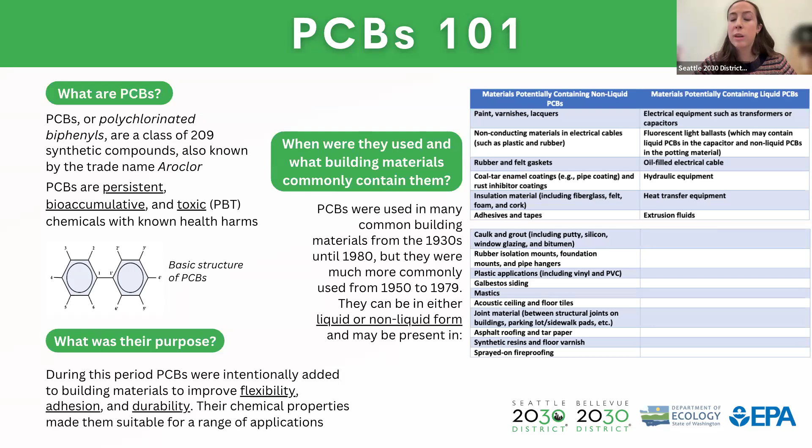Now let's explore a little bit about where PCBs are often detected and why this is important. They can be detected on the exteriors of buildings, specifically in materials like paint and window caulking, as I already mentioned, and they can get into the environment through a variety of different ways. For example, when these sources are weathered, either by human or non-human sources, so think of rain versus pressure washing, they can wash into our stormwater systems and eventually flow into our waterways. And this process shows how legacy materials are still impacting our environment long after their manufacture was banned. And we'll get into this dynamic a little bit more later.

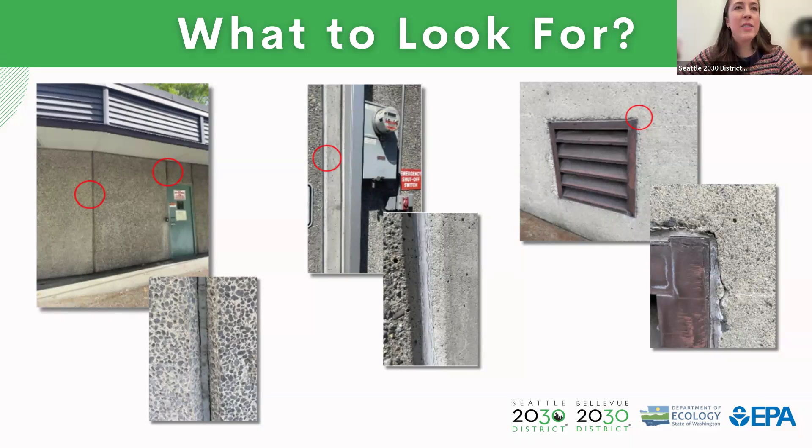Like we were saying, and as you probably just saw in that diagram, there's such a wide variety of materials that contain PCBs, so it's hard to know for sure when you're going to find them, but I wanted to include some examples here. It's just developing an eye for it, developing a familiarity with what to look for and where to look for it. Here's some more examples of exterior building materials that were suspected of containing PCBs.

So Julianne can walk him around the perimeter of a building, and he can be a good indication of where and when testing might be required. So he's a great resource.

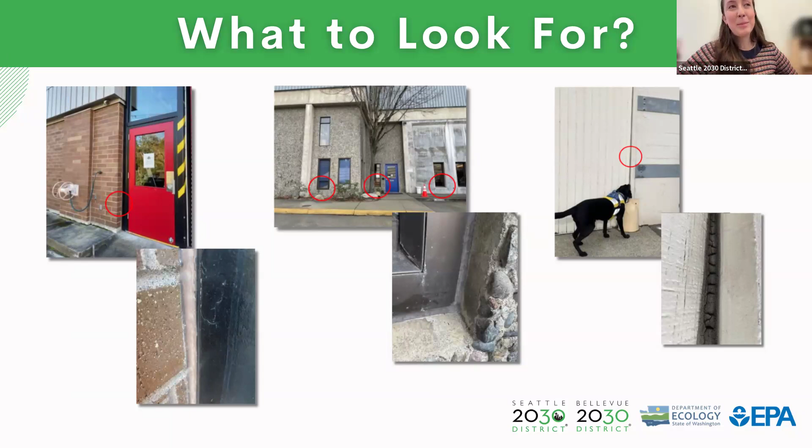But I always want to include Jasper's work because I think not only is he an incredible tool, but also a great entry point into this topic. And if I had learned about Jasper earlier, I think I would have maybe wanted to learn more about PCBs earlier too. So I love to include him. And then here are just a few more examples.

And though it's not really pictured here, I have been told by a few remediation professionals that a hallmark of spotting PCB-containing materials is if it's still shiny looking, sticky, gooey looking, even decades after it was applied. So recall that PCBs were designed to resist heat, they were designed to be a strong, resilient adhesive. And in some scenarios, it means that these materials can still look really fresh and new, even though they're very, very old.

So, this individual was talking about a PCB-containing material that was above an exit sign, and he was saying it looked fresh. It looked like it had just been laid down yesterday. So that's a thing that might raise some flags.

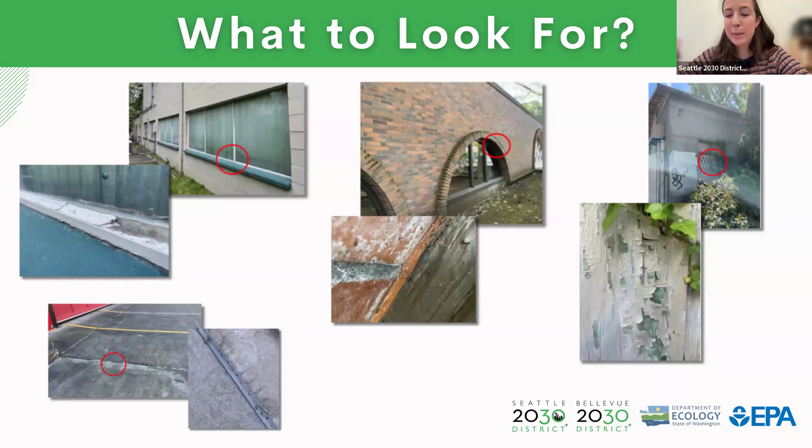I also wanted to put PCBs within the context of some other hazards that you're probably all quite familiar with. So, like lead and asbestos, PCBs are regulated by different federal and state laws. They're also classified as hazardous materials that pose risks to human health, and they're all found in these older buildings constructed between 1950 and 1980. However, there are some qualities that set PCBs apart from lead and asbestos.

So, one difference is that PCBs are synthetic, while lead and asbestos actually occur naturally in the environment, which honestly was kind of news to me. I did not know that asbestos was just naturally occurring in the environment. But in comparison, PCBs are also more expensive to remediate and they can be in a solid or a liquid form, while lead and asbestos are only found in solid forms.

And this is all to say that even if you're hearing about PCBs for the first time today, you're likely already familiar with some of their defining characteristics, and you might already kind of know how to deal with them because you've handled other hazards in a similar way.

So even though I might be introducing them to you as if they were new, they've actually been around since the 50s. They were born out of the chemical inventions that followed World War Two, just like many other chemicals we're grappling with today. So I want you all to feel not that this is something new and scary, but it's actually been around for a while, and you might know more about it than you think.

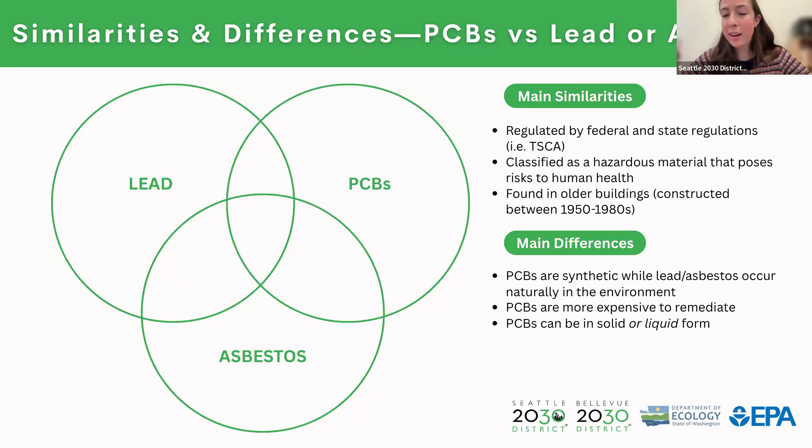Now that we have all that background covered, we can dive a bit deeper and discuss PCBs' negative effects on human and environmental health. So, in order to fully understand and appreciate some of the regulations and recommendations pertaining to them, it's really valuable, I think, to understand the negative consequences of PCB contamination. So, PCB-containing building materials can pose health risks and they contaminate stormwater, soils, sediment, and indoor air. They are persistent, bioaccumulative, and toxic chemicals with known health harms.

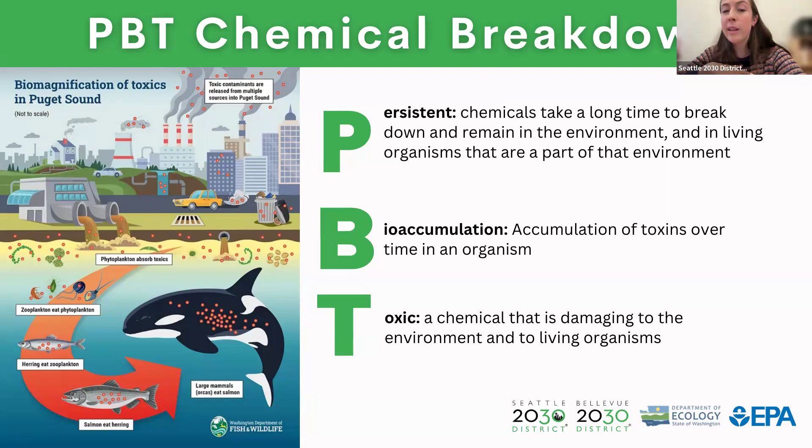And unlike other toxins that might degrade over time or be broken down after being exposed to sunlight or other things, PCBs were chemically designed to be really resilient and stubborn. So they really stick around. And one thing that really stuck with me when I first learned about this topic was that there's no population of salmon in the Puget Sound with a permissible level of PCBs, which is pretty shocking. And we'll talk more about what that permissible level is moving forward.

So even though PCBs were banned by TSCA nearly 50 years ago, and we're going to talk about that a little bit more later, many water bodies across Washington still don't meet water quality standards. And it's pretty shocking, but it was found that while the level of other toxics are steady or they're decreasing, PCBs in particular are still increasing. And after an investigation of this phenomenon, it was concluded that stormwater is the main pathway channeling PCBs to our waterways, and that external building surfaces are still these active sources of PCBs.

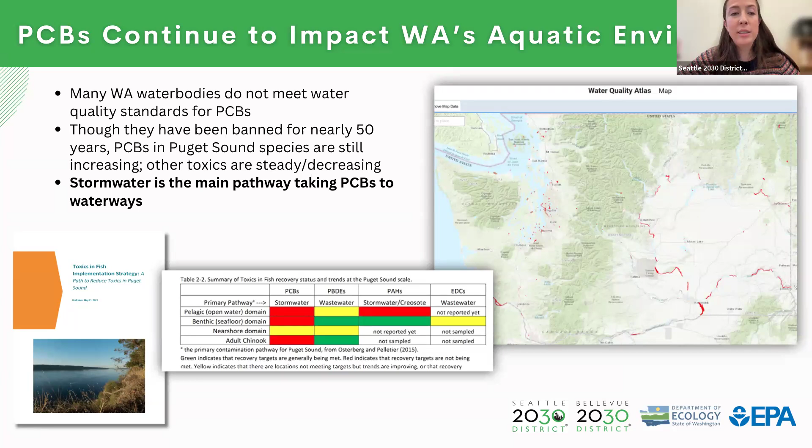We'll get more into this later, but it was kind of this huge puzzle for a while. Like, why are we still seeing these figures increase when PCBs aren't being produced anymore? Where are these elevated levels coming from? So, Ecology conducted an investigation, and it's caused a lot of new knowledge about how we can address this issue. But before we go into that, I wanted to discuss some of the exposure routes for PCBs.

And for people, the main exposure route is typically diet. And this is just by consuming food contaminated with PCBs. Think of the fish that we saw in that diagram a couple slides ago. And individuals can also be exposed due to workplace repair, maintenance of certain items, improper PCB remediation and disposal projects, older appliances that contain and release PCBs when they're used, or some electrical equipment accidents and spills.

And there was a recent case of pretty acute PCB exposure at the Sky Valley Education Center in Monroe, Washington. Some of you might be familiar with it, but students and staff reported some pretty severe health conditions. And this ultimately led to a massive settlement with Monsanto. So that's a case in which the exposure route was pretty much just direct exposure from leaky lighting ballasts.

And as I've already alluded to, PCBs have toxic effects on the immune, reproductive, nervous, and endocrine systems in people and other organisms. They're known to cause cancer in animals, and they're very likely to cause cancer in people too. Even at really low concentrations, PCBs in water can affect aquatic life and human health. They're considered to be one of the most toxic chemicals in the Puget Sound.

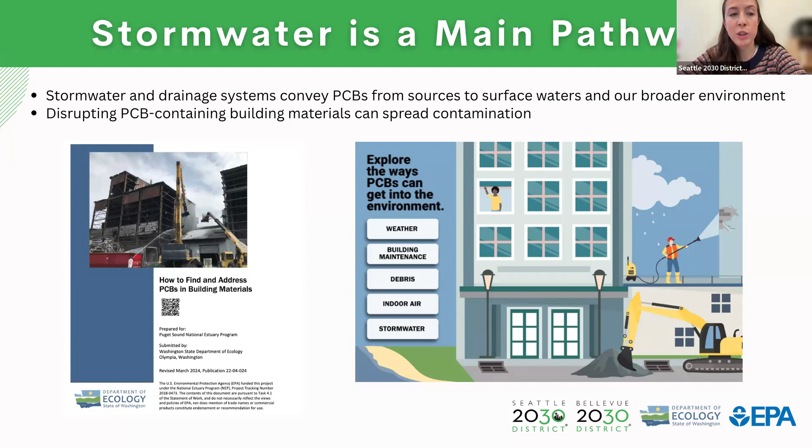And in addition to the weathering and disrupting of PCB-containing material, activities like demolition and renovation can also lead to greater discharges of PCB-containing materials. And this is why, again, it's really important that you're testing for those things before you start these activities. And stormwater and drainage systems are really what can convey these PCBs from not just the surfaces of buildings, but then to our surface waters, our sediment, our biota across Washington. So this process took a while to figure out, and there was sort of this connecting-the-dots moment that had to happen.

So even though it was a little unsettling, I'm sure, to realize that these legacy materials are still impacting human health, they're still impacting our environment, figuring this all out was really important because it finally gave the Department of Ecology an avenue to turn off the tap. Knowing where the problem is and where it was stemming from, they could finally design a strategy to mitigate it.

And the way they approached this ended up being the MS4 permits and the Stormwater Manual for Washington. So recently, the Stormwater Manual for Washington was updated to include some language around PCBs, and this included best management practices for roof and building drains at manufacturing and commercial buildings. It also included washing and steam cleaning vehicles, equipment, and building structures. It included details about construction, demolition, and building repair.

And you can find the link to the most recent stormwater management manual on Ecology's website. And we're about to talk a whole lot more about this. So it's really important, I think, to be aware of these guidelines and broader context behind PCB regulations. But you're probably wondering at this point, okay, what exactly do I need to do to comply with regulations? What are some actual action items?

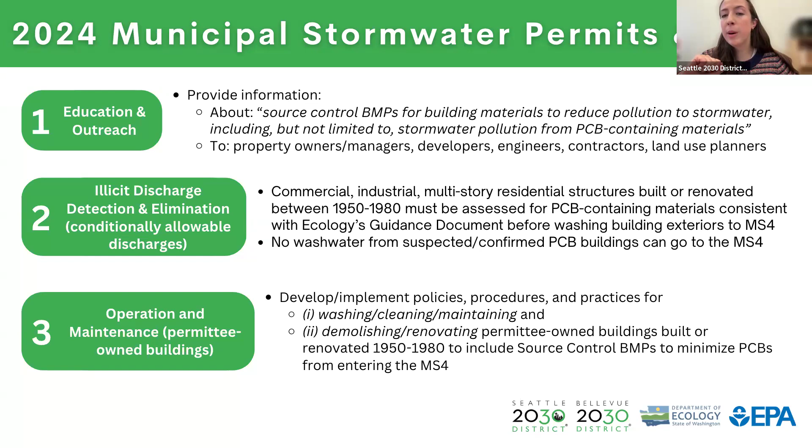So now I'm going to go into these specific steps you should take to being in accordance with updated BMPs. And this involved a three-pillar approach. So it involved first education and outreach. It then included illicit discharge detection and elimination, and finally operation and maintenance, specifically for municipal buildings. And this pertains to municipal stormwater permittees, but I think it's also useful for property owners and building managers to hear about this too, to learn how the landscape is really changing here.

And so the first part of this was education and outreach. You're encouraged to use what's available. There's already so much information, and this involves sharing information from the Washington Department of Ecology with property owners and building managers. And there's a lot of resources on Ecology's website, including guidance docs, focus sheets, a cost estimation tool, as well as more resources on the EPA's webpage.

So these two sites offer a wealth of knowledge on PCBs and strategies for testing, remediation. They offer a really great entry point for contractors, property owners, building managers, other stakeholders as well to learn about how to prevent PCBs from entering stormwater.

And I also want to mention that my team, as part of this grant, developed a series of educational mailers highlighting these resources. We also developed a building list using publicly available assessor's office data for buildings that are likely to contain PCBs based on their construction year or their use type or their size. So if you're interested in any of these materials, I'm happy to share them with you, and I'll make sure to mention them one more time before the end of today's workshop.

But the second component of compliance had to do with guidance on washing down buildings, particularly limiting pressure washing. And this meant strategizing how to caution building managers and property owners against washing down their buildings unless they know it's free from PCBs. And so this might involve training folks how to identify a high-risk building based on characteristics like age and build type.

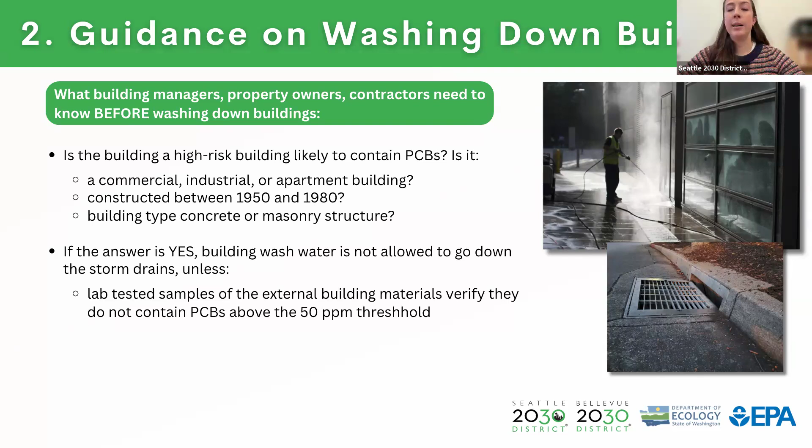So there is a bit of navigating between these two things as part of this, making sure that your building is clean, but also that you're preventing PCBs from accidentally getting into the stormwater system. Here's just some additional guidance on washing down buildings.

So again, not allowing wash water to enter storm drains. You can cover storm drains, and you can capture that wash water using a containment system. Depending on the level of PCBs potentially in there, you might be able to divert it to a landscaped area, but there are also facilities that treat this.

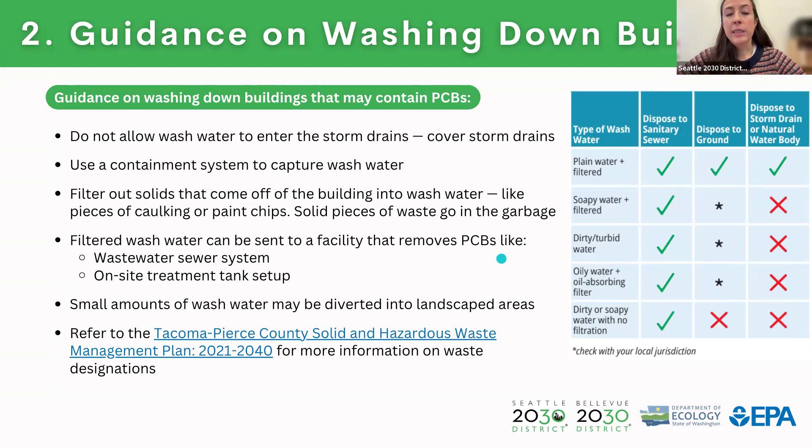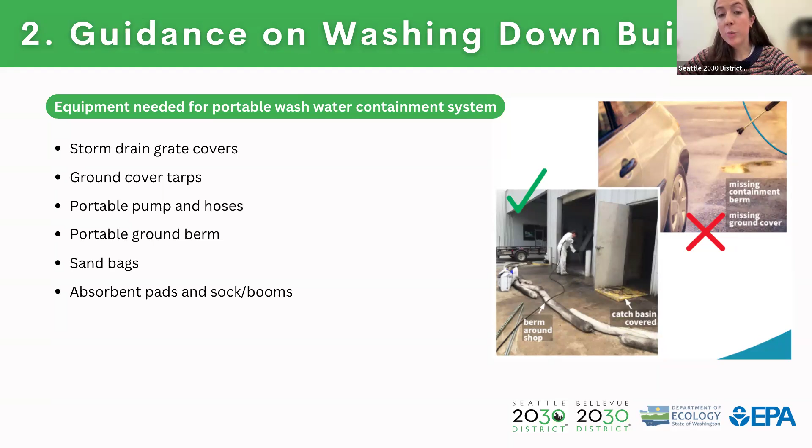And then finally, the third component of compliance is factoring in PCBs during demolition and renovation of city buildings. It essentially means that when you're planning these activities, PCBs should be kept in mind. You should consider whether they could potentially be present, again, depending on the construction year or the use type. If it was built or renovated between 1950 and 1980, then that's your indication that you should be taking this into consideration.

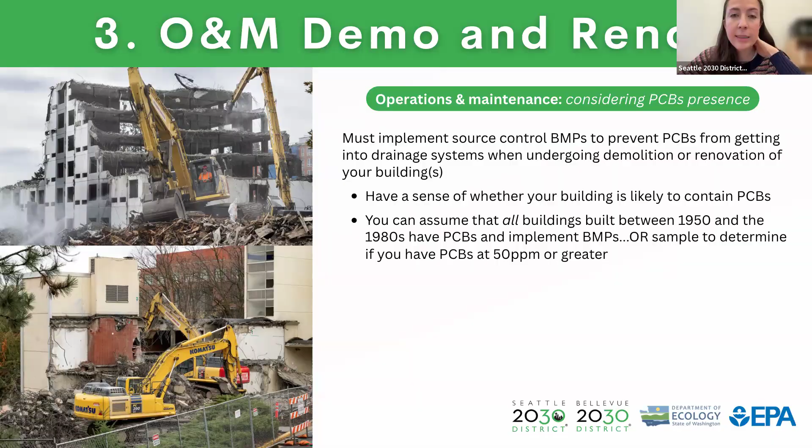And again, it just avoids accidentally violating things like the Clean Water Act. These permit requirements in general were designed to protect our drainage systems and our water safety. So now I'm going to walk us through one case study where this played out, and this will give you a better sense, for building managers and property owners, of what this process actually looks like for testing and abating sources of PCBs.

And it's the Rainier Commons, otherwise known as the Old Rainier Brewery. If you're in the Seattle area or if you've ever been driving on I-5, you've probably passed it, and you might have noticed there was some scaffolding up for quite a while, and this actually was a PCB remediation project.

So this site was a mixed-use development with 24 buildings on a 4.6 acre parcel, and it included both residential as well as warehouse spaces and storage spaces, and it was exactly the kind of site where PCB risks can be really spread across different structures and different materials.

So back in 2004, Seattle Public Utilities was doing a routine sediment sampling in a nearby catch basin, and they found elevated levels of PCBs. This triggered an investigation, and it ultimately traced back to the exterior of one of the Rainier Commons buildings, and that sample came in at a staggering 213,000 parts per million, well beyond the EPA threshold of 50 parts per million, as we talked about earlier. So that's a really high number.

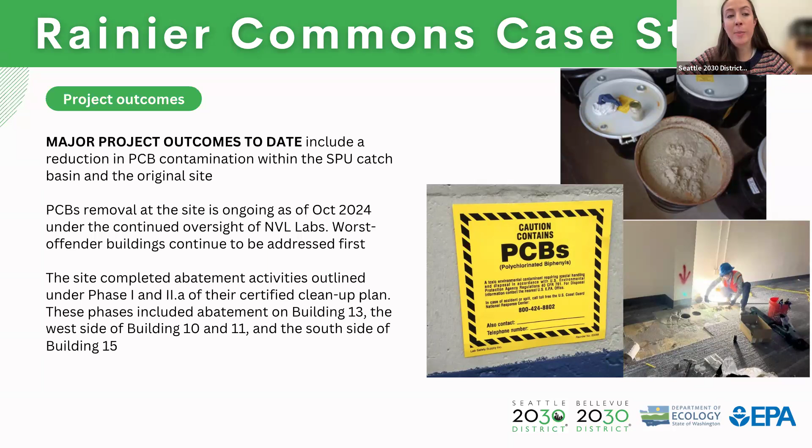So now we can talk more broadly about what this process generally looks like. When you're on a site, the first step is just to look for risk indicators. Again, start with the construction year, start with the building's use type, and then inventory any suspected materials. So looking at the paints or the sealants, the mastics, things like that.

And at this stage, it's really important to document as much as you can. So taking photos, describing the condition of the materials, estimating the quantity of materials, and all of this will help you build up your sampling strategy later on, and it also keeps the project defensible.

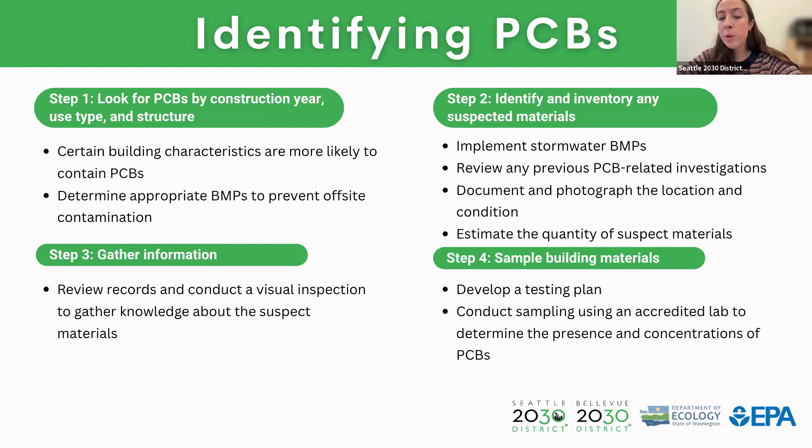You should also check for any past reports or stormwater inspections that might have hinted at earlier PCB discoveries. And after this comes the planning and sampling stage. So developing a testing plan based on your visual observations and also the building's risk profile. Testing needs to be done by or coordinated through an accredited laboratory, and the sampling itself must follow EPA and state protocols. And the results will guide everything from there. It'll guide the scope of the removal, whether containment is needed, and which disposal rules apply.

So, assuming you find PCBs above this 50 parts per million threshold, you need to develop a site-specific abatement strategy. Again, it's not a one-size-fits-all process, which sometimes makes it difficult to talk about and difficult to answer questions because it depends so much on the characteristics of your own site. The method really needs to be based on the concentration and the type of material involved. It'll depend heavily on whether the PCBs are in a liquid form, whether you're remediating lighting ballasts, or whether it's in a solid form, if it's paint versus expansion joints, how invasive the process is going to be, if you can just scrape it off outside your building, or if it's going to involve a more intensive process.

For example, at the Rainier Commons, they used an abrasive blasting and hand removal tool under negative pressure containment. And that was really required to prevent airborne contamination or runoff contamination. Think of all the dust that would be generated from that, and all of that needs to be dealt with to keep not only the people working on it safe, but to make sure that those abatement activities are actually effective and not just spreading contamination around. During abatement, it's really important that detailed field notes are kept, that photographs are taken, and these are required for your final report. And they can really make or break regulatory compliance.